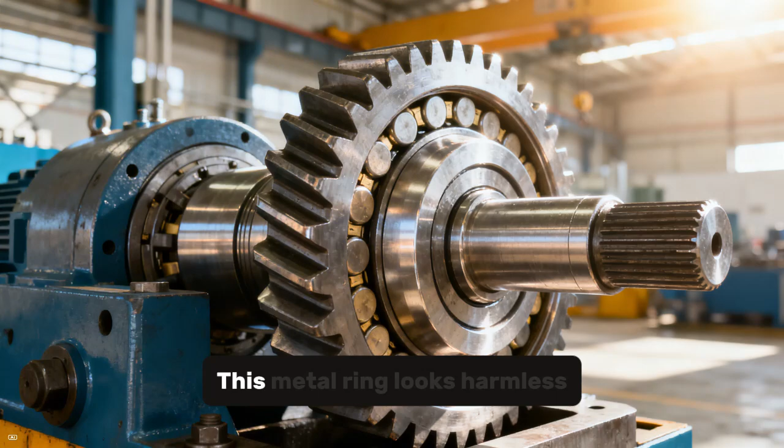This metal ring looks harmless. It costs less than a dinner for two. But when it failed inside an industrial gearbox, the entire production line stopped. Within hours, the losses were counted in millions. And the failure started with a crack thinner than a human hair.

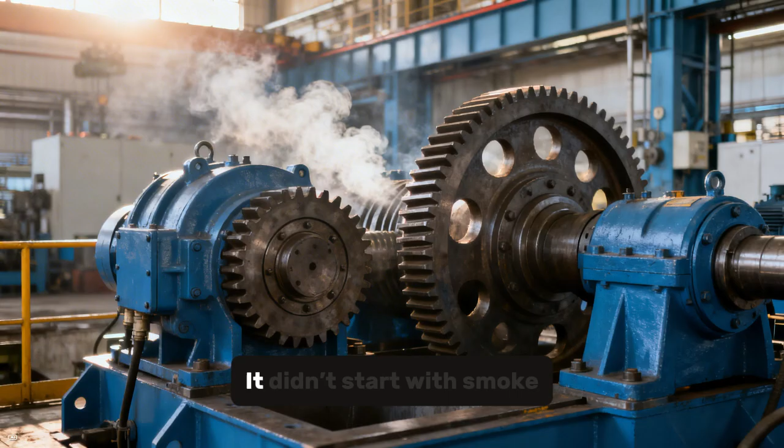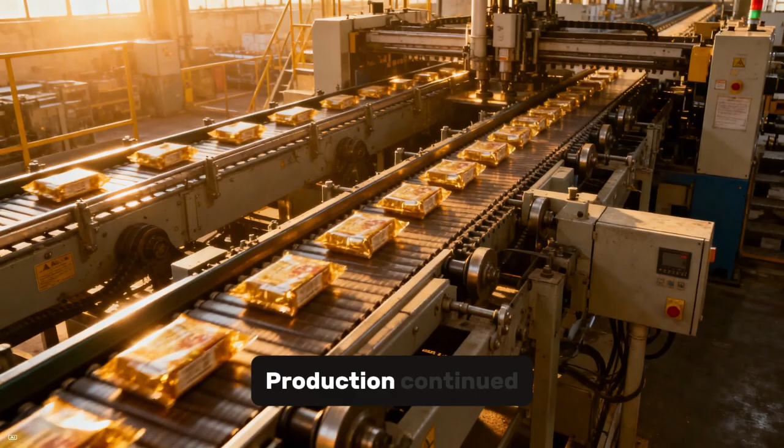It didn't start with smoke. It didn't start with alarms. It started with a slight vibration. Operators noticed a low humming noise. Temperature looked normal. Oil level was fine. No warning lights. Production continued. Inside the bearing, damage was already spreading.

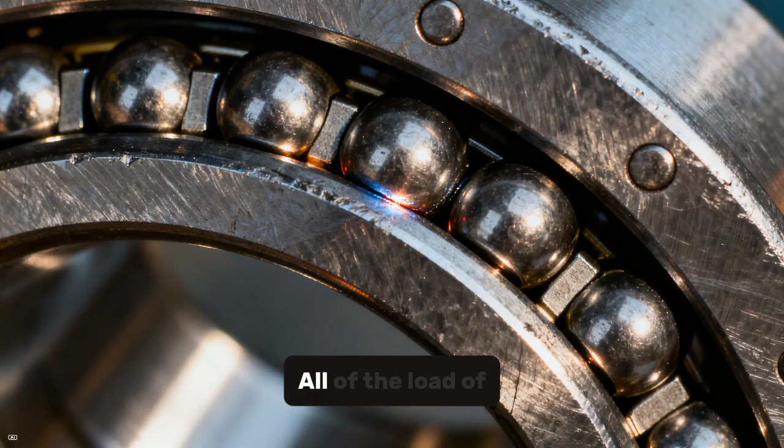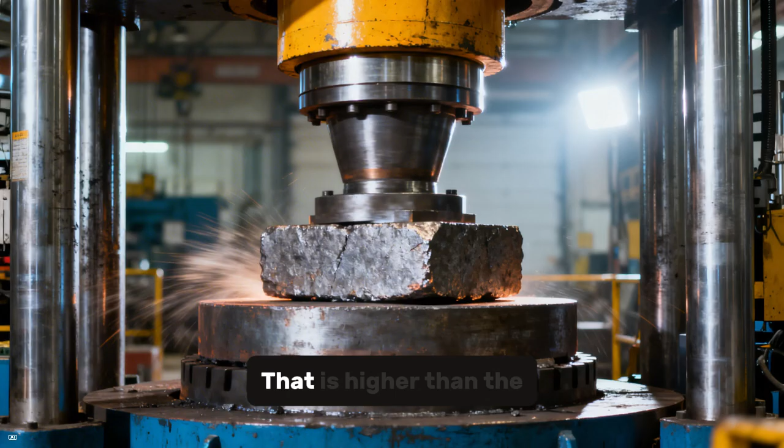Every rotating machine depends on bearings. They support shafts. They keep gears aligned. They reduce friction. All of the load of a rotating shaft is transferred through tiny contact areas between hardened steel surfaces. In these microscopic zones, the pressure can exceed 2,000 megapascals. That is higher than the pressure inside a hydraulic press, and it happens millions of times per hour.

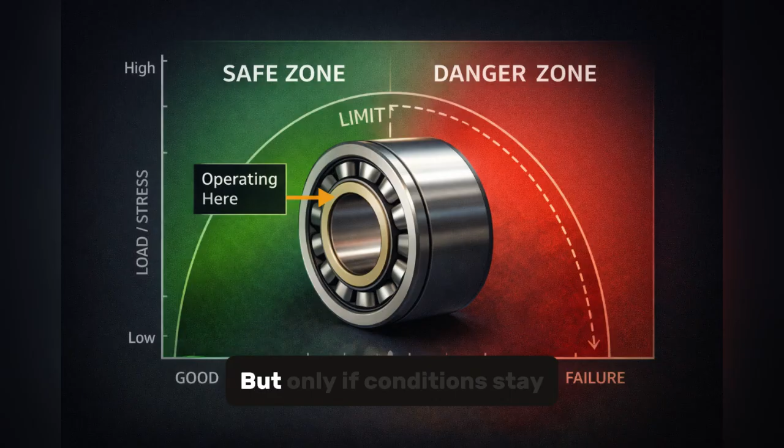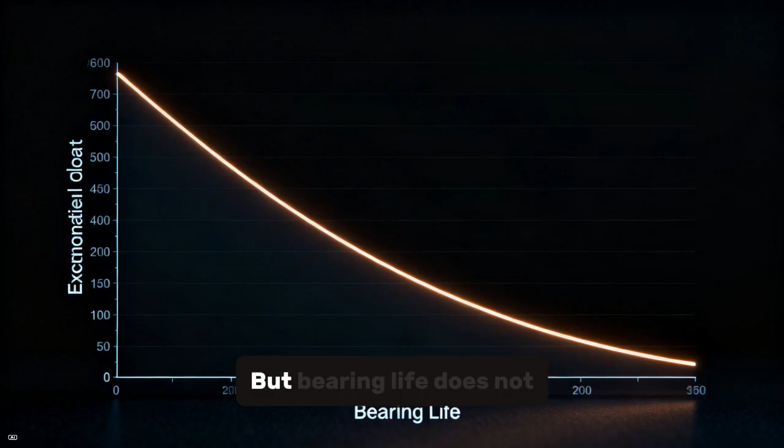Bearings survive this because the load is distributed and protected by a thin film of lubricant, but only if conditions stay within limits. In this case, the gearbox experienced repeated peak loads during heavy operation. Not extreme overload, just slightly above design conditions. But bearing life does not decrease slowly. It decreases exponentially. A moderate load increase can cut expected lifetime nearly in half.

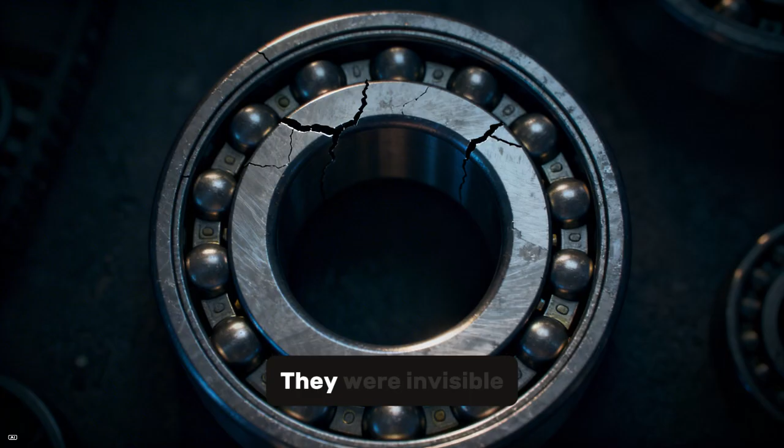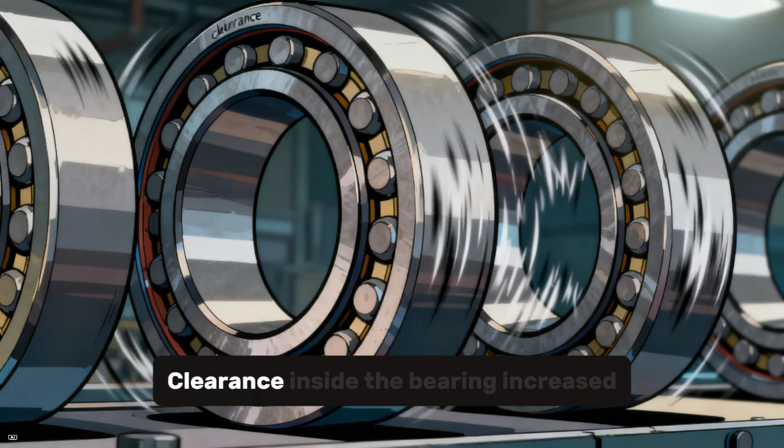Inside the raceway, microscopic cracks formed beneath the surface. They were invisible. They grew with every rotation. After millions of cycles, small fragments of material broke away. This is called spalling. Now the damage accelerated. Metal particles contaminated the lubricant, clearance inside the bearing increased, vibration rose. Still no alarms, because the damage was internal.

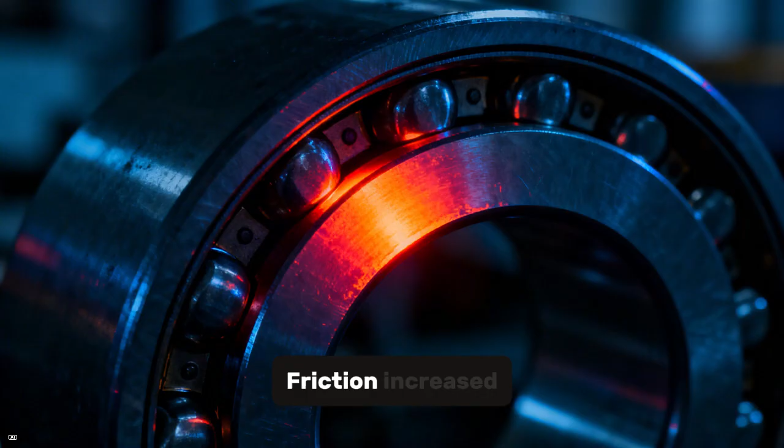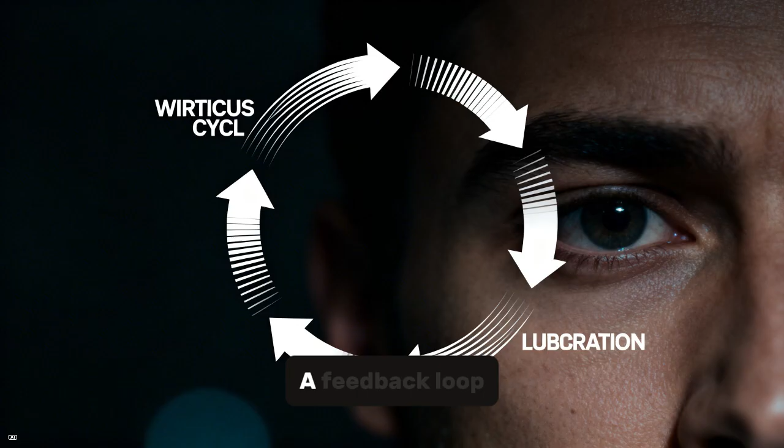As surface damage expanded, the rolling elements no longer moved smoothly. Friction increased, heat built up. The protective lubricant film began to collapse locally. More heat created thinner lubrication. Thinner lubrication created more metal contact. A feedback loop. Within hours, temperature spiked. The bearing started to seize.

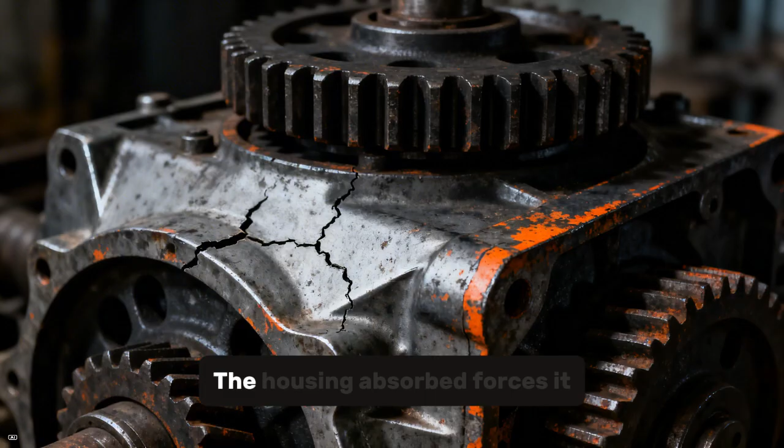When it finally locked, the gearbox stopped instantly. Torque transfer broke. Gear teeth experienced shock loading. The housing absorbed forces it was never designed to handle. The production line shut down. In automotive manufacturing, a single day of downtime can cost millions of euros, all caused by a component smaller than your palm.

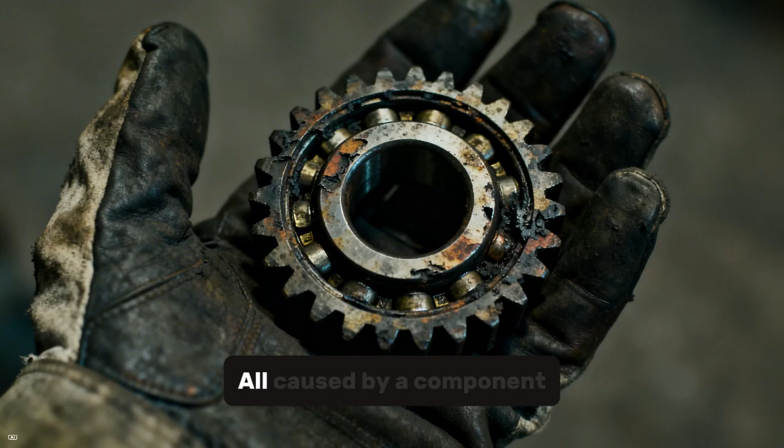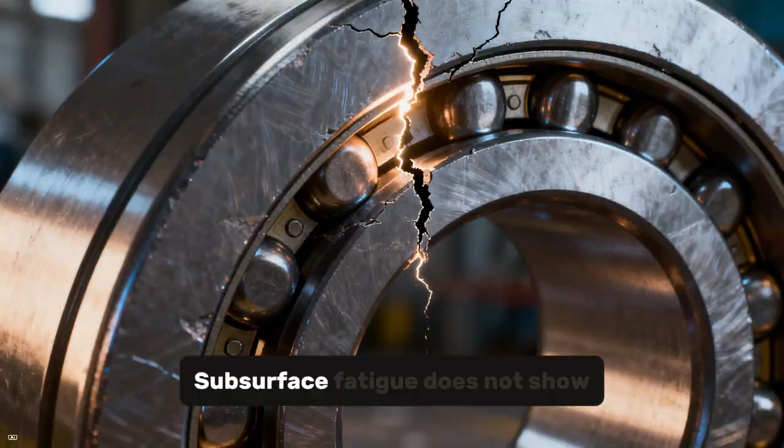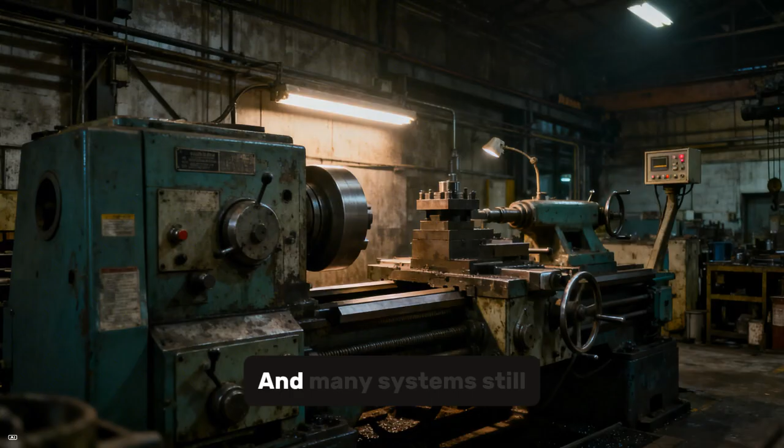The failure remained hidden because no visible cracks, no oil leak, no early temperature spike, no fault codes. Subsurface fatigue does not show itself until damage reaches the surface. Without continuous vibration monitoring or particle analysis, early detection is almost impossible, and many systems still operate without advanced condition monitoring. This failure was not dramatic. It was gradual. It followed the laws of material science.

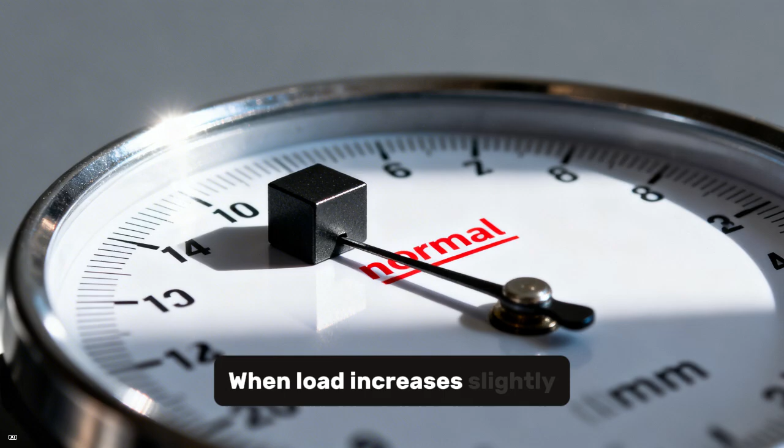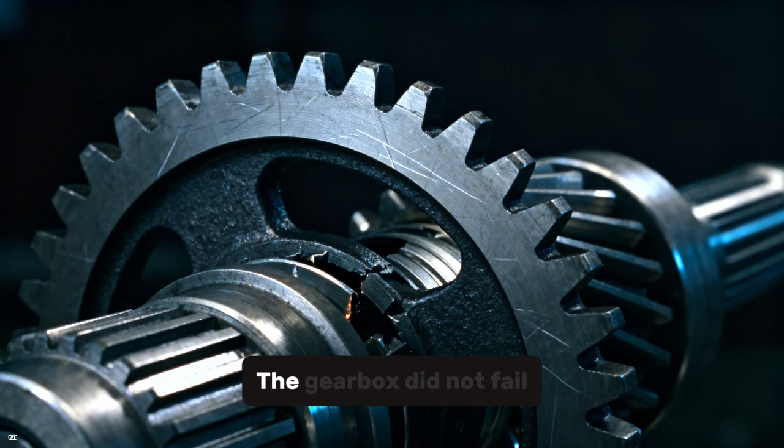Modern machinery operates close to physical limits. When load increases slightly, when lubrication degrades slightly, when alignment shifts slightly, the safety margin disappears, and the system pays the price. The gearbox did not fail in one moment. It failed over millions of microscopic stress cycles, one crack at a time, hidden beneath polished steel. Small component, massive consequences. This is how machines really fail.